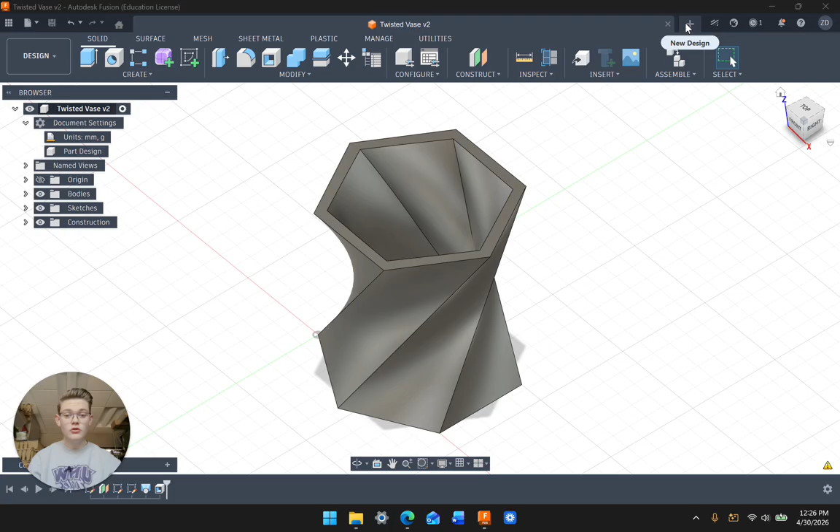It's time for another Fusion Basics tutorial, and today we're going to be making a twisted vase. The first thing we're going to do here is create a new sketch. You can see our finished design there, to get you excited.

We're going to be creating the base first. So we're just going to create a sketch on the bottom, and we're going to create our edge polygon here. Then we're going to do 50 millimeters of side length, and 6 sides. Then we can finish sketch.

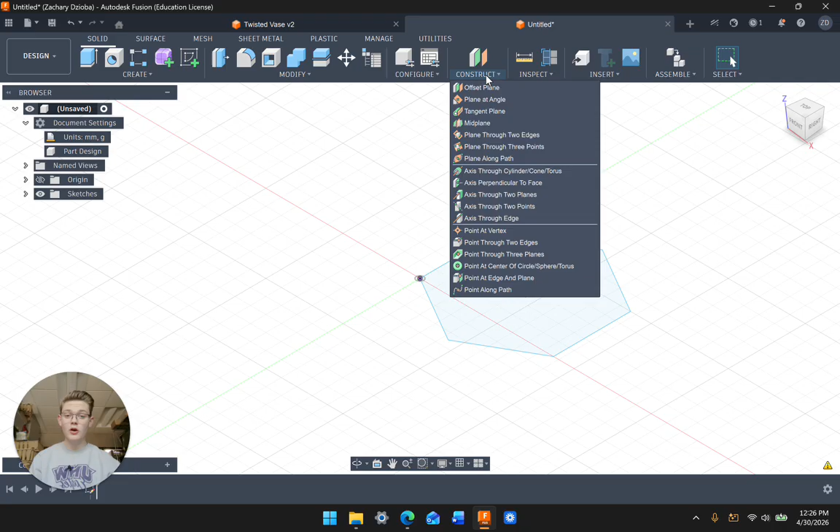Now we're going to bring back our old friend, offset plane. We're going to create it from the bottom, and go 100 millimeters up. And now I'm going to show you a nifty little trick real quick here.

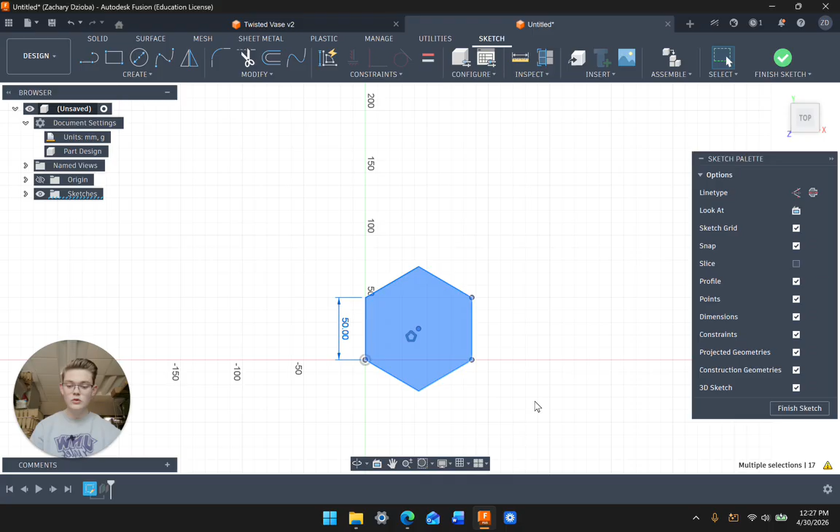If we go back into our sketch, right click on it and say edit sketch, if we highlight all of this, then type Control C, using this keyboard shortcut - on macOS it's Command instead of Control, so whenever I say Control, just note on macOS it's Command - then if we use Command C or Control C, we can finish sketch.

And then up here on this plane, we're going to create another sketch. And then we're just going to do Control V or Command V on macOS. Then we can click OK, and finish the sketch. And now we have 2 of these here.

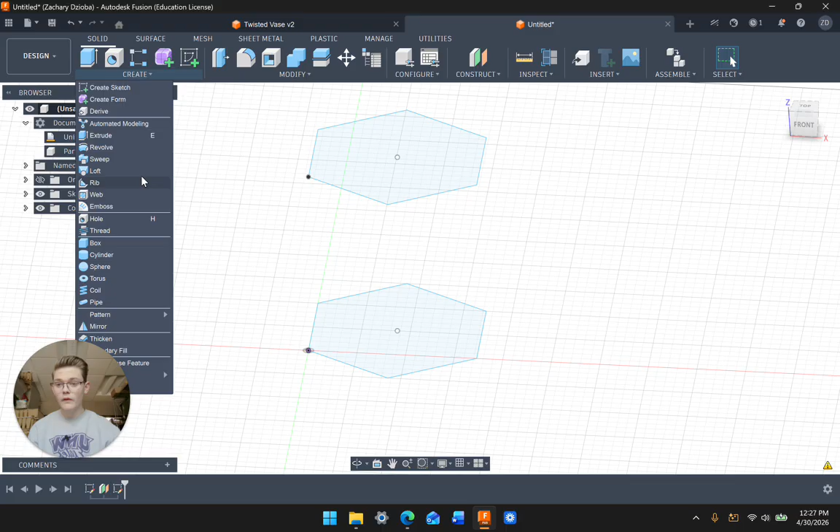Oh, and that's nice, it hid the construction plane for me. So now we can look and see in our Create menu, there is the Loft tool right here. We can click our bottom sketch, click our top sketch, our 2 sketches, and then it bridges the gap there.

But then how do we twist it? That is the age-old question.

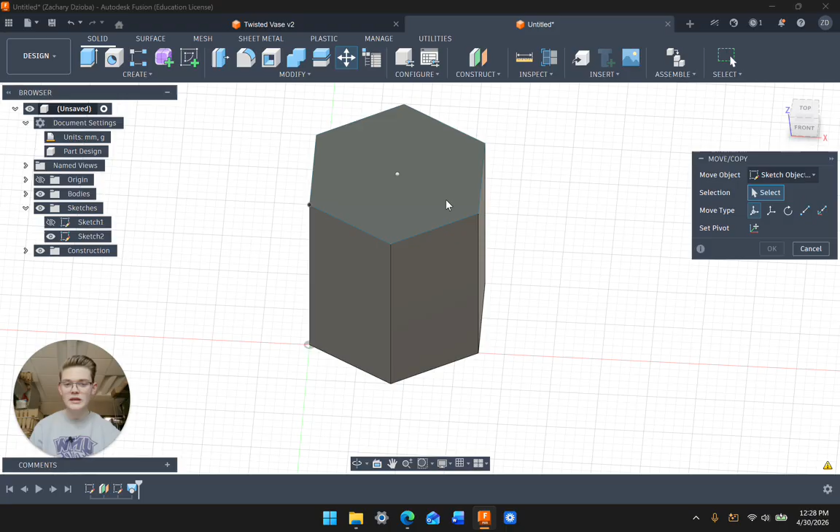So what we can do is go into our sketches and turn on the visibility of our sketch 2, we can use the move tool. It's right up here, I just clicked M on my keyboard. Then if we click the center point and then click all of these lines around it, right here, we can rotate here.

Oh, that was way the wrong plane. Okay, yeah, make sure you're rotating in the right plane there. And then if I press OK, then you can see it rotates.

But it only rotates a little bit because when we're in the Loft tool - I'll go back into it - you can see it automatically bridges the 2 closest vertices here and here. So if you rotate it too much, it's not going to keep rotating. We want to spin it a ton.

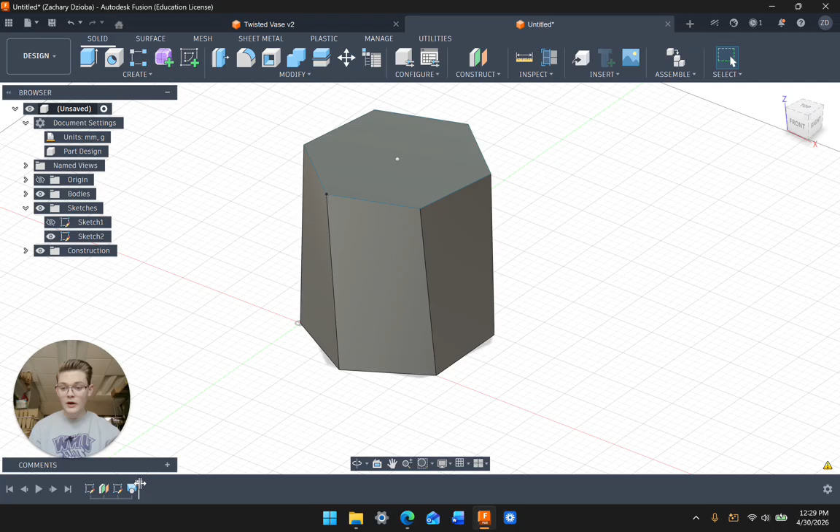So we have to go back in time now. We're just going to drag our timeline back. You've got to turn on your sketch 1 again. And we're actually going to create things called rails for our Loft tool. If we create the sketch, we'll create it on a side plane.

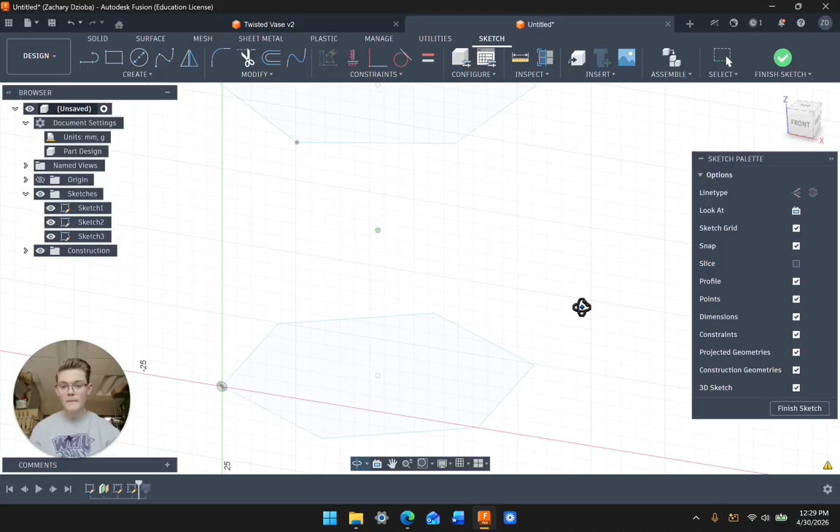And here is where our nifty 3D sketch comes in handy. So make sure 3D sketch is turned on right here. Then if we rotate here a little bit, we're just going to use the line tool. If you hover over one of these vertices, it automatically lets you create one to the other point. So we're going to create these vertices to each point.

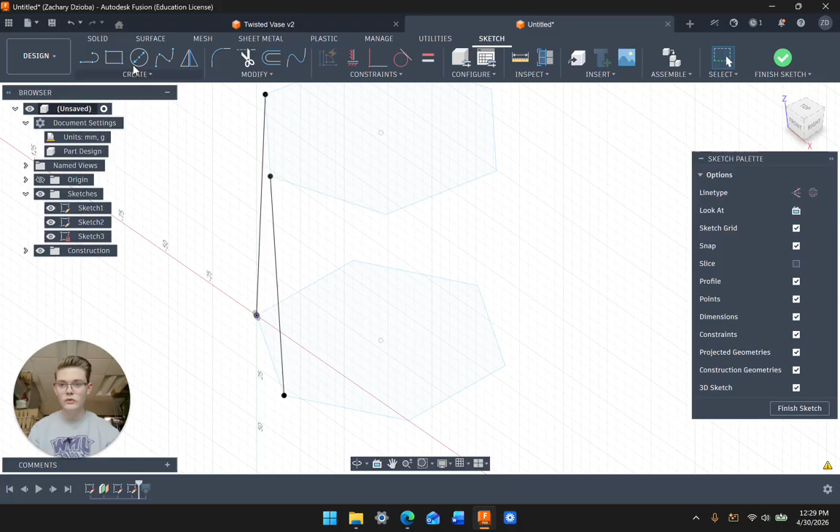I'm just pressing Control Z to get out of the line tool when I'm done, but it'll automatically snap to these points because it's a 3D sketch. And then I'm just rotating around and doing all of these.

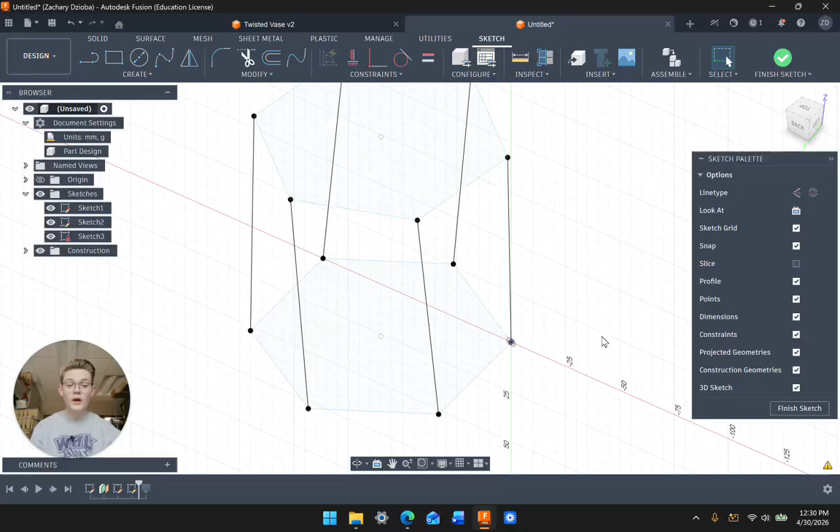And now we've got our structures, our rails, in place. So we can finish the sketch and we can go back - back to the future, if you will. And we can right click our Loft feature and edit feature.

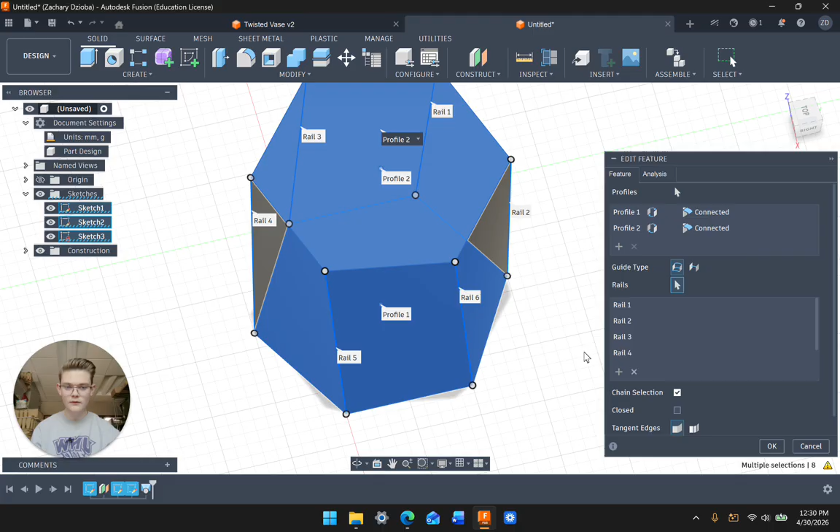And now in rails - so this section is the rails section - we can press plus and click all of these sides that we just created here. This will confine how it rotates when we create these 2 sketches. So we have all of our rails in here, make sure all of them are highlighted, and then we can press OK.

Now we can hide sketch 1, but leave sketch 2 available, because if we go to our move tool - and make sure you have this, I should have said this before, but make sure it's sketch objects when you're moving things. Otherwise it's not going to let you move these objects or rotate them. You have to make sure your selection set is on sketch objects.

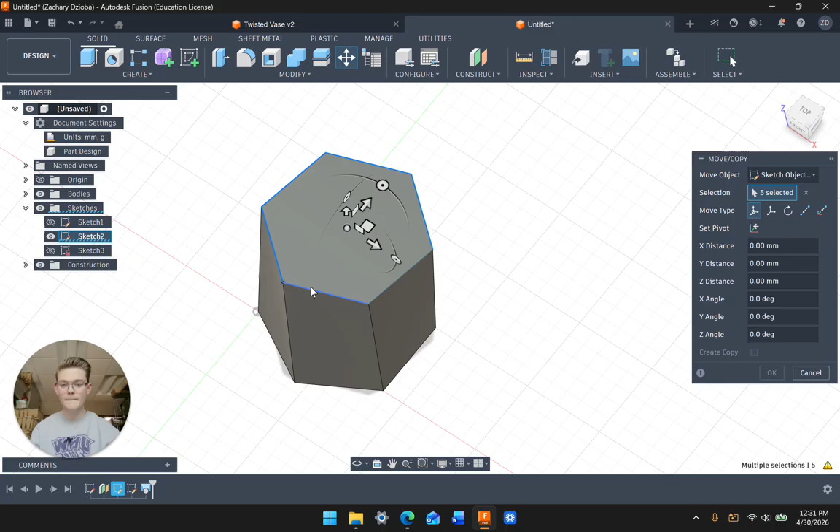And then we can select all of these lines here. Now we can rotate and maybe do 150 degrees, see how that turns out. Well, that is really, really rotated.

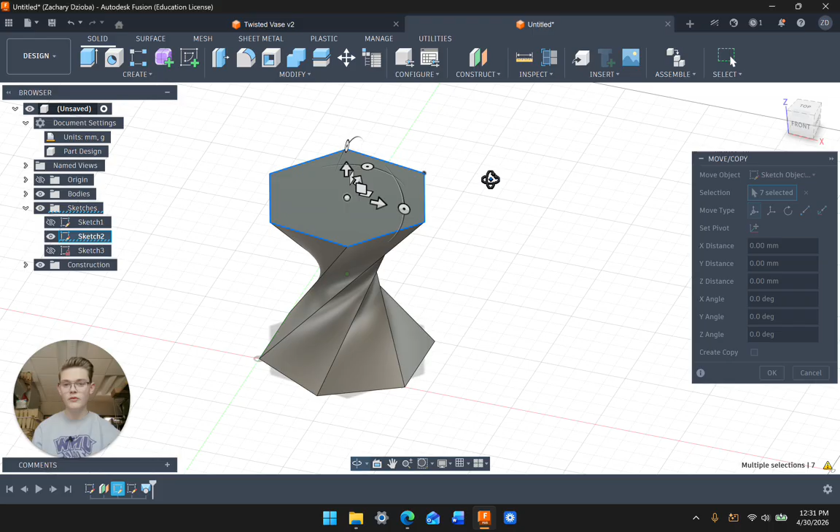So I'm going to go back and remove that back a little bit. But you can see how now it's letting us rotate it more and more because we have those rails. So I'm going to rotate it maybe just that much. Oh, that's not enough, that doesn't look very good. Bear with me while I make this look good.

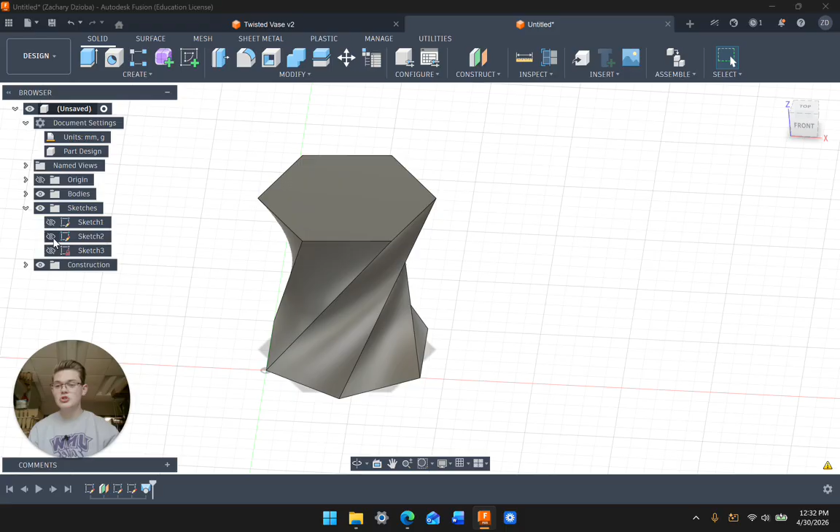Okay, I'm pretty happy with that, that looks pretty good. So now I'm going to hide sketch 2 just so it's out of our way, but it's not a vase yet.

So we have to go back to our trusty shell tool, and then we're going to click our top face. I'm going to do 5 millimeters here. And now, there we go - there is the twisted vase.

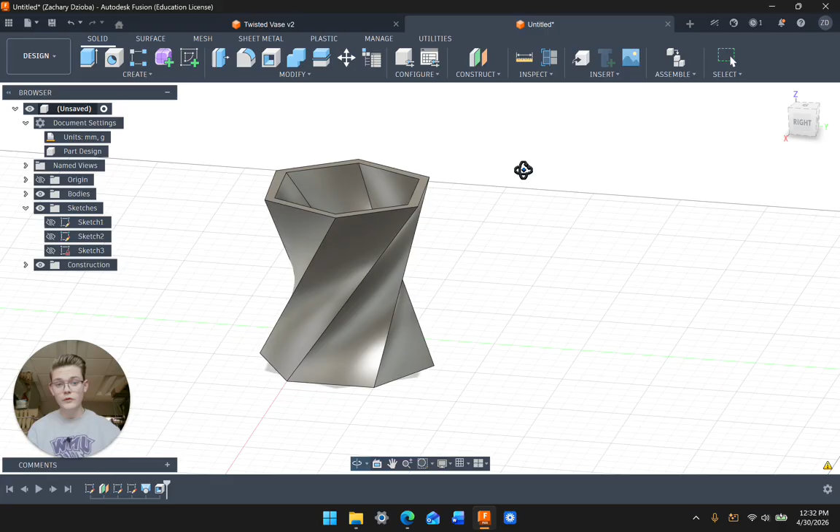And you can do this with all sorts of different shapes. As long as you have the rails and those vertices from the 3D sketch, it'll look really cool. You can make it taller, shorter, skinnier, wider - just play around with it and have fun, because honestly the loft tool is super fun and useful for a variety of different things. But make sure to save your project, and I hope you have fun with this one.